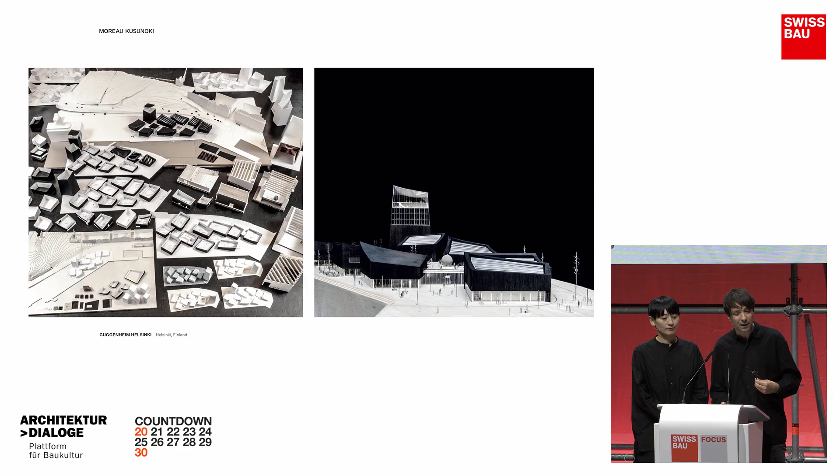I will show you. This project is also very meaningful for us because it crystallized some concept ideas that we are still developing and trying to implement, which is this idea of in-between space, or MA, that Hiroko could develop more, since it's a very Japanese approach of thinking space and time. It's this fragmented and in-between space that we believe is a moment in architecture that could expand life, expand poetry, or expand your own contemplation when you are visiting a museum in particular. You need this moment of being with yourself. We can speak a lot about that, but that's not the main topic.

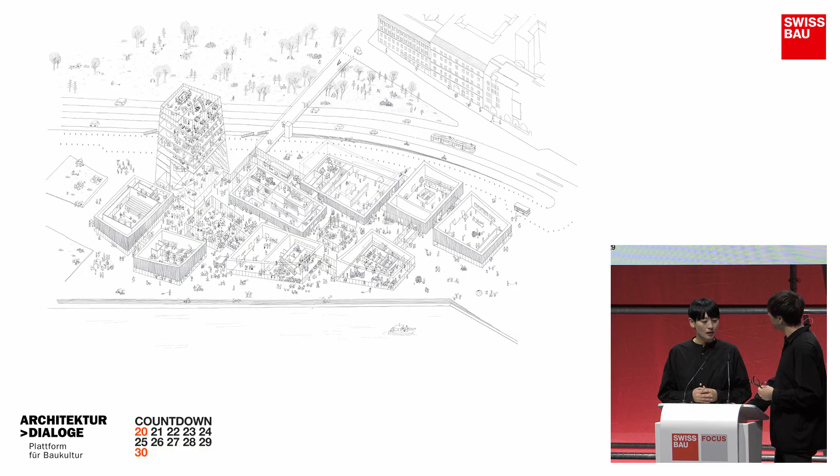Hiroko's drawings, you want to speak maybe? Yes. We started from this competition to make a hand drawing together with a mind map that we're going to show later. It's a black and white drawing, trying to not invite people to too rapidly understand the project, but rather to spend time getting familiar slowly.

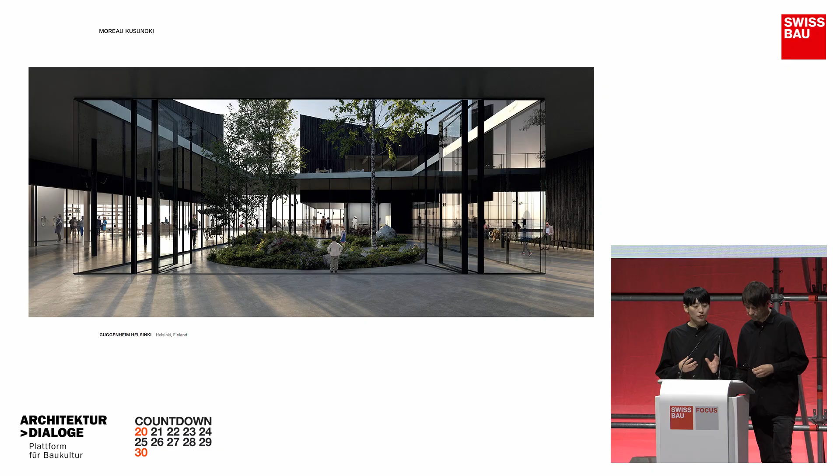So it was the idea with this fragmented volume that the visitor can really make their own experience, rather than being entertained by the overly designed building.

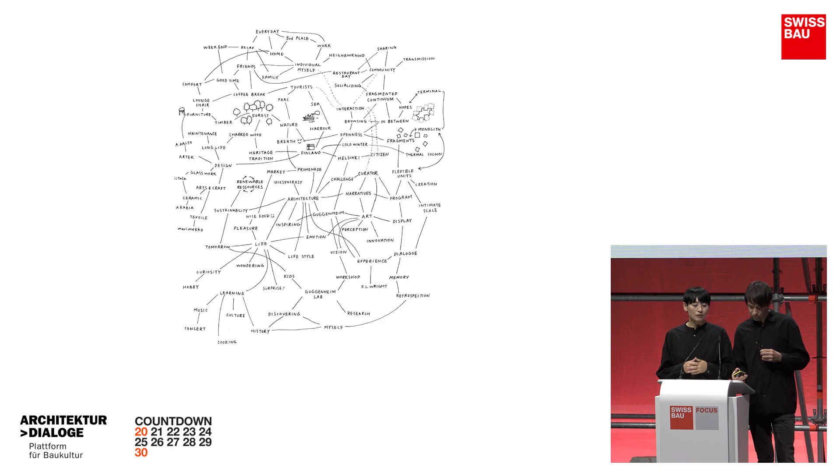So this is a mind map, shown in black and white, with key elements that normally don't appear in the competition brief, but are the essence we believe is important for the museum experience, like the flavor of good coffee or a calm corner to spend a moment of meditation. This kind of thing isn't politically strong enough to appear printed in the paper, but it's fundamentally important, so we try to give it value and not forget it in the process of conception.

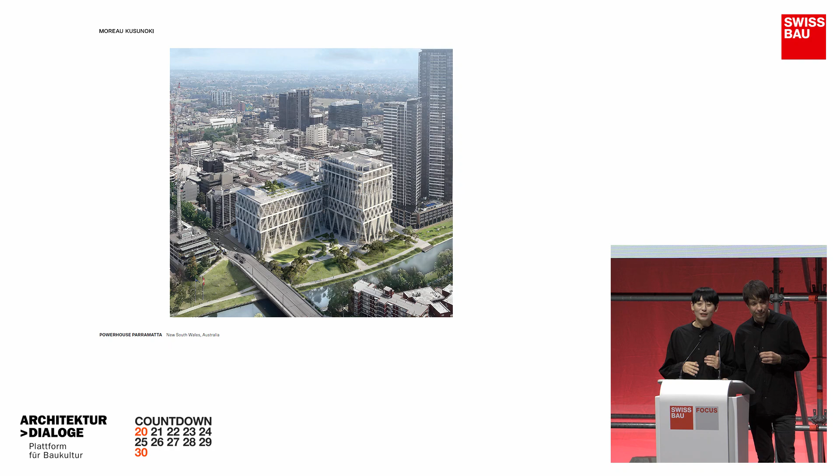The next project is a powerhouse in Parramatta. It's going to be built, so it's a real project, actually opening this year around October. It's in Parramatta City, the biggest hub from Sydney, with 30,000 square meters of exhibition space, quite similar scale to the Pompidou. Actually, there are many common points with the Pompidou.

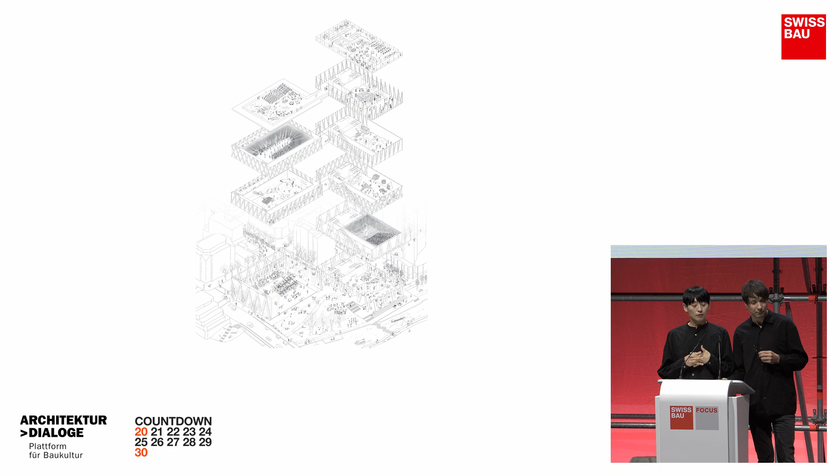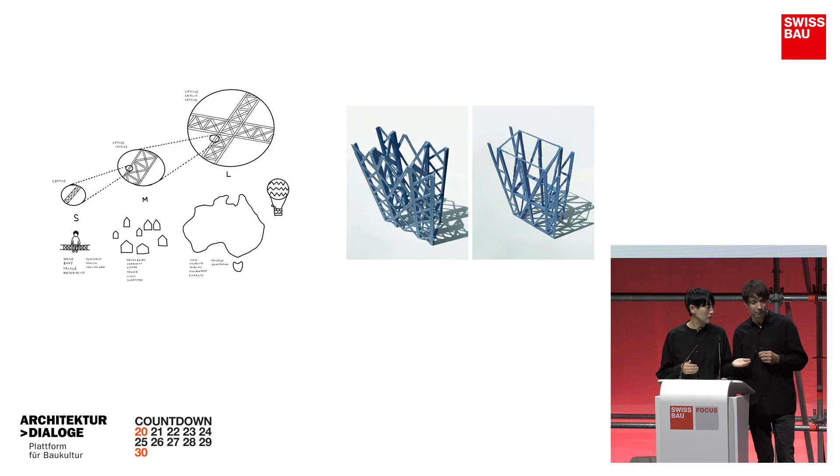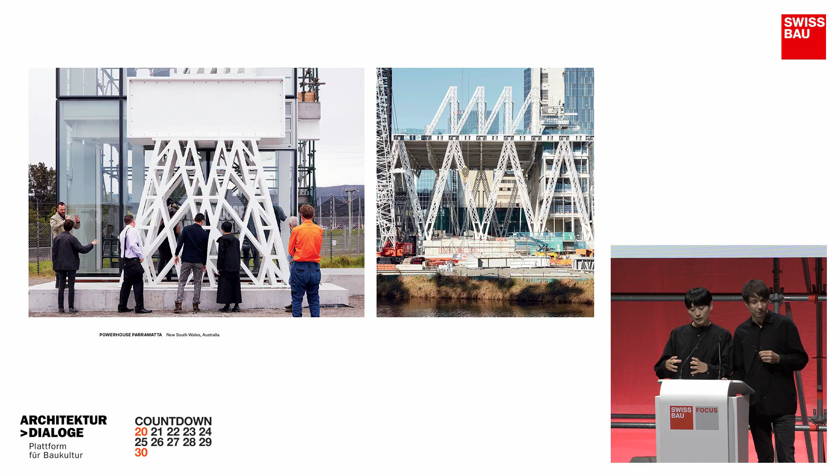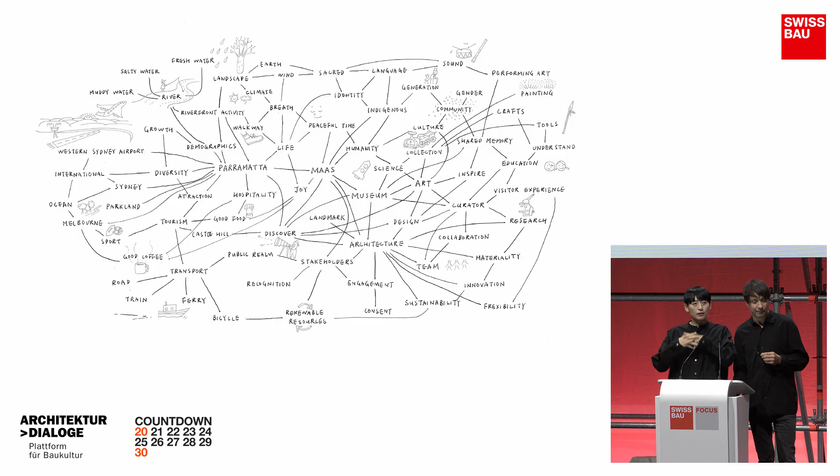It was built with a system of structure we invented with Japanese structural engineer Jun Sato. We call it lattice, lattice, lattice. It's a combination of three layers of scale: the smallest lattice is the size of a hand, reminding you of the body scale. Combining the small size becomes a medium size, and we use this truss system to build the building. Then combining the medium scale becomes large scale to make this infrastructural size of building.

Again, we made this mind map. We don't go into the detail. Okay, so now, Pompidou—so we can slow down.

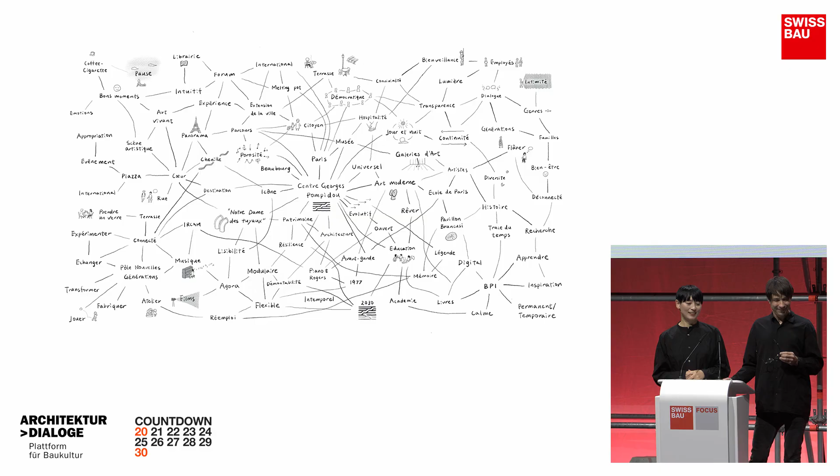Yes, so the Pompidou Center—it's nearly 50 years now since completion, and the building has aged, so there's a need for refurbishing. A competition was launched first just for purely renovation: changing the facades, changing the joints, the systems, removing pollution from asbestos. An engineer team won that competition about 5 years ago.

Then the president, Laurent Le Bon, realized it would have been a missed opportunity not to rethink the usage of the Pompidou—just reopening as it is would be a missed opportunity. So they decided to launch a second competition, which is the one we won, about rethinking usage. We are somehow married, and made a joint team with the engineers to go together into construction, which is starting in a few months now.

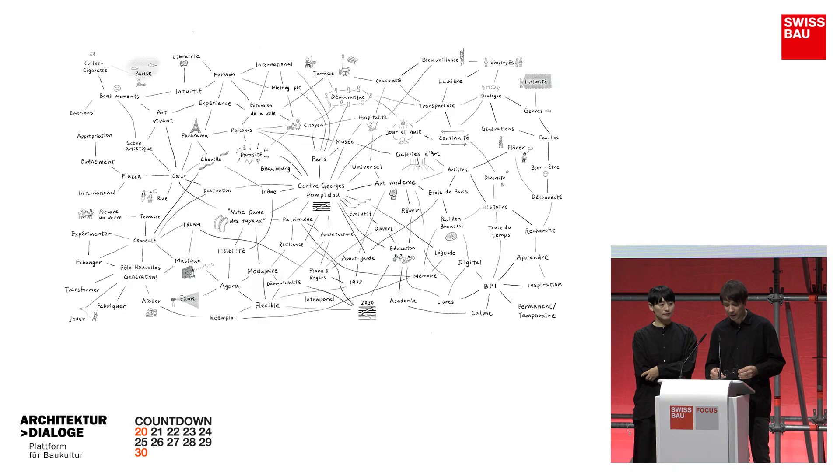So our proposal is, first, acknowledging that there is a heritage. This building is not protected, actually, and we are working on the protection—this is also something playing a role in the process. But our approach was already very, I mean, the word respectful—I don't know if it's the best word, but I think it is about that.

It's acknowledging the qualities and approaching the renovation in a manner where we don't want to denature—to change what is making the identity—and trying to keep what is making the authenticity and the initial qualities.

Even more, I think it's about an understanding that after 50 years, there are layers of accumulated change processed by the operators, the different directors. There are 11 directions inside the Pompidou, 2,000 people working in it—it's a city in the city. They've been creating slabs, adding things, changing facades, not necessarily in the best manner, or even putting the structure in danger at a certain moment by opening a certain area.

So our approach was to understand, to remove somehow this kind of pollution, these kinds of things, and to go back to maybe some ideals that were there 50 years ago—about transparency, porosity, transversality between fields: art, books, music, live theater, or live art vivant, which was really the concept in 1977 when it opened, a very subversive, crazy moment in history. The Pompidou is the incarnation of that moment.

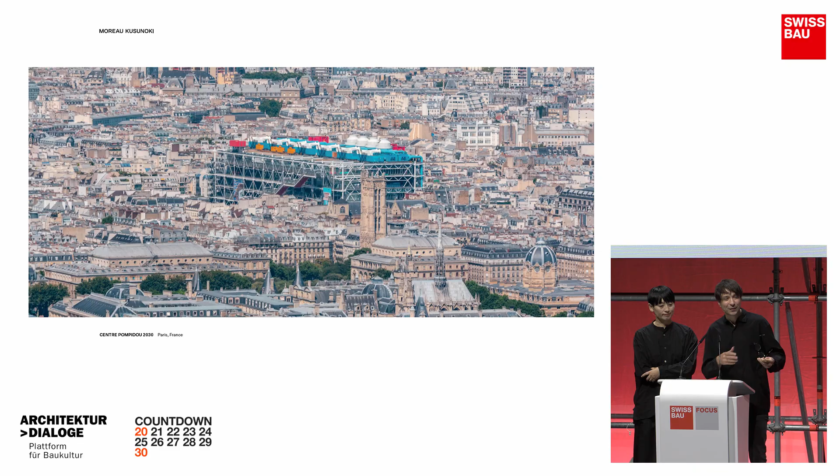So how to go back? Somehow it's funny, because it's going back in a respectful manner, but I feel that this attitude is somehow subversive today.

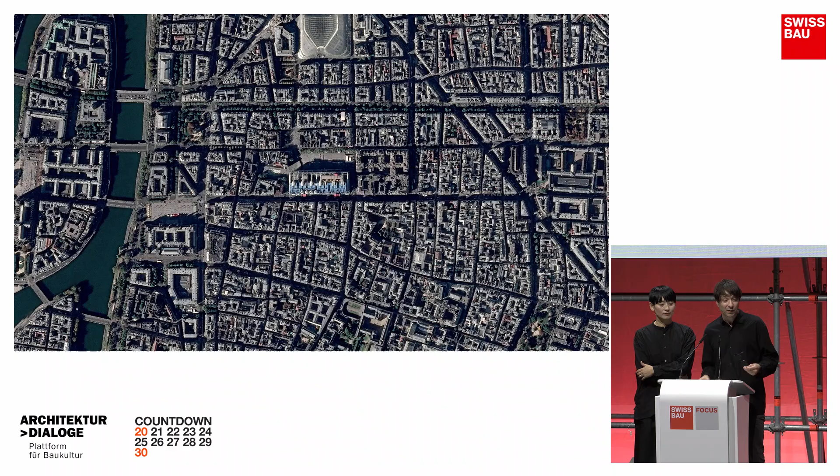So this, you know the story of the competition. It was an open competition, more than 500 teams. Monsieur Pompidou and his wife chose a project, and they were very much implicated in the process. There was Philip Johnson in the jury, and Jean Prouvé, and this crazy project happened, which is really the baby of Renzo Piano, because it was really how he made his career.

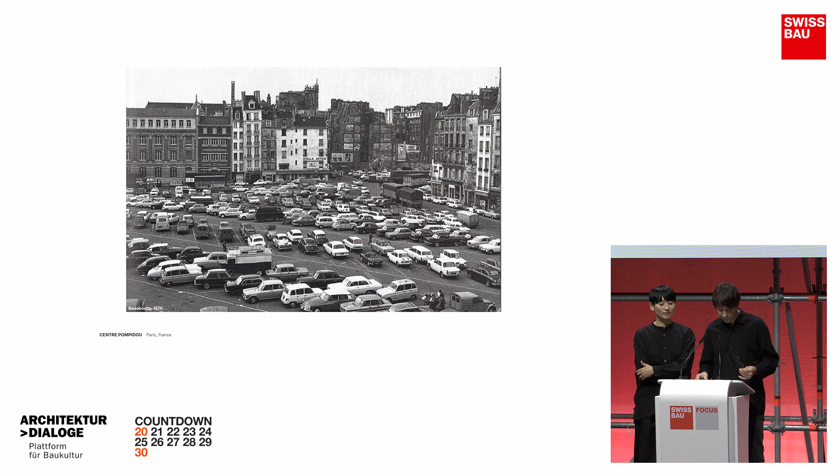That was the site before the construction, and that was the drawings at the competition stage, where you could see there was a lot of evolution between what they initially thought and what we have today. But there are core elements, like this logic of a plug-in city, a grid where you have the box, the large grid, and behind the building, creating this double height. Or the fact the building is lifted, which has somewhat disappeared, but is still there in a way, and I will go into detail about that.

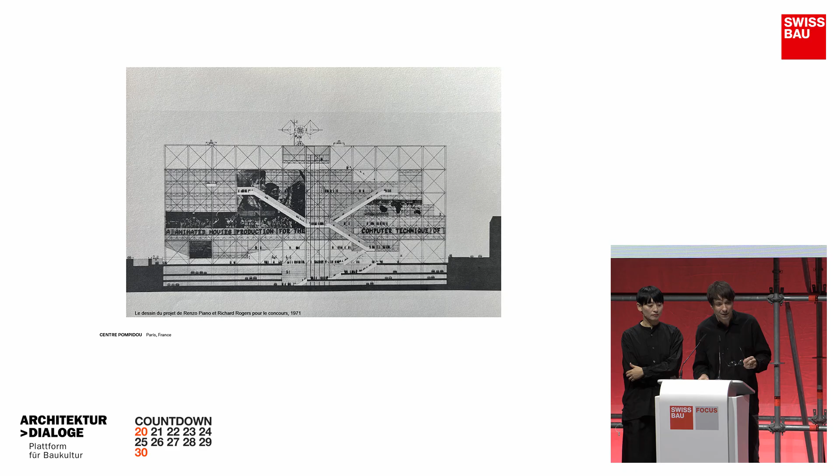The Agora and Forum, going down into the ground, you can see the connection with the cars, which was also kind of the dogmatism of the 70s, where everything should be organized around the car. So there is a tunnel actually next to this building. Buses were supposed to go there, and trucks below.

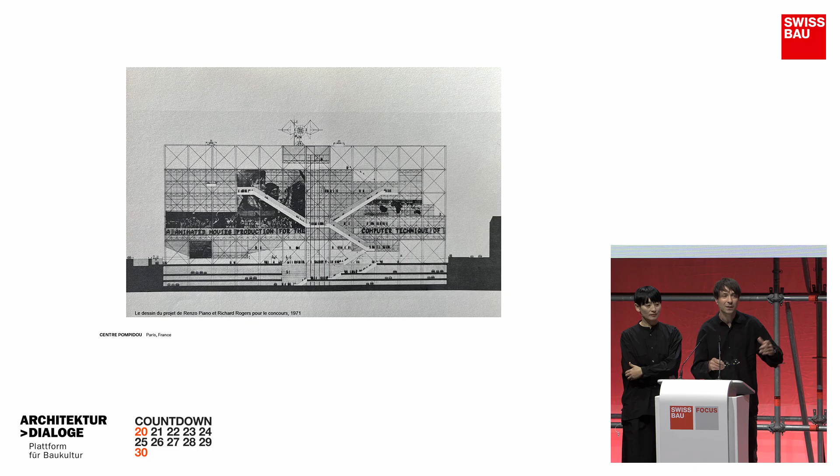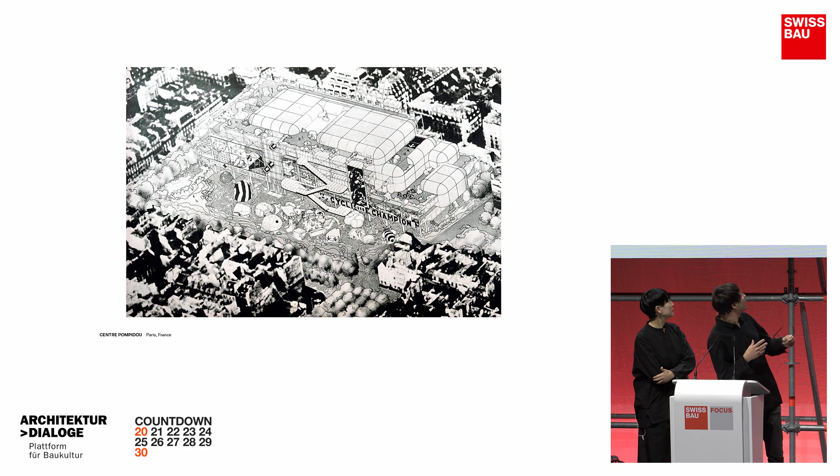Never happened. And here you can see an evolution. After they won, they maybe did a bit too much, trying to find other solutions, which they never pursued. But it's funny to see the piazza, how they wanted to make it maybe softer, with more plants also at a certain moment.

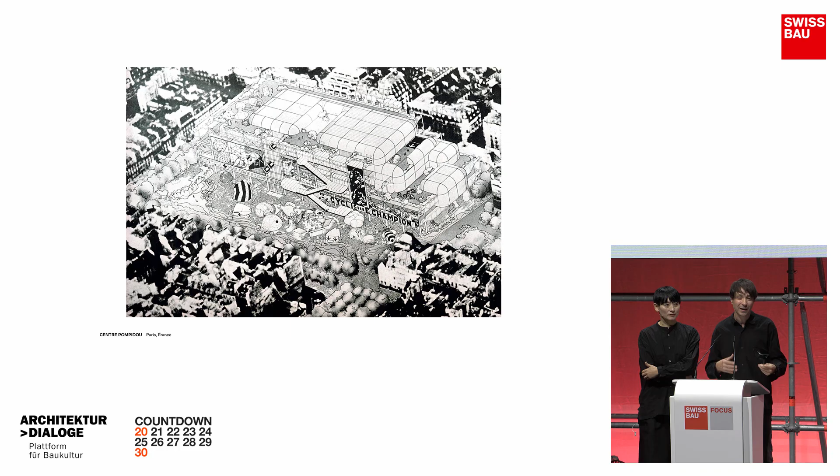And that's just after the opening. The opening was a huge success. The story says people were scared there would not be enough people, so they planned a circus on the piazza, in case people were unhappy, they could go to the circus. Well, and then it was a huge success that we still know—millions of visitors every year.

And the question is now, with this legacy, how we see things. First, the opportunity came, as I've seen, I'll show you the slide with the parking. Sorry, we'll go back. Oh, it's a bit—I will have another slide. Never mind. Below the piazza, you have 5 levels actually.

It's an iceberg. There is a production unit of 10 workshops, also a bit of storage, machinery, but there are also 3 layers of parking, which are underused. There is also a tunnel that was built by the city to bring in the big delivery trucks, and the tunnel was built too low, so no truck can ever enter this basement.

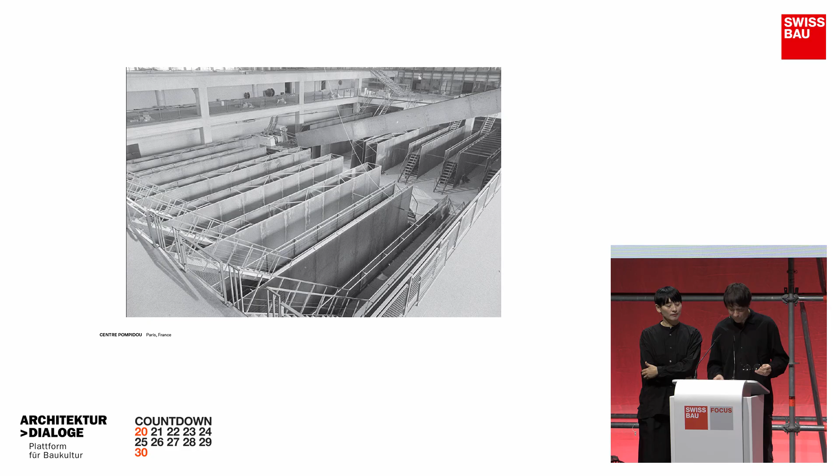So that gives us now the opportunity to create exhibition rooms underground below that piazza, removing where the cars are no longer necessary. And it gives us a chance to create something that has also disappeared, which is the vastness of the Agora.

That's a sketch made by Renzo for the competition, as an inspirational moment for the competitors. You can see this idea of using below the piazza as a public space, finding a way to have the vibrant core again back in the Agora.

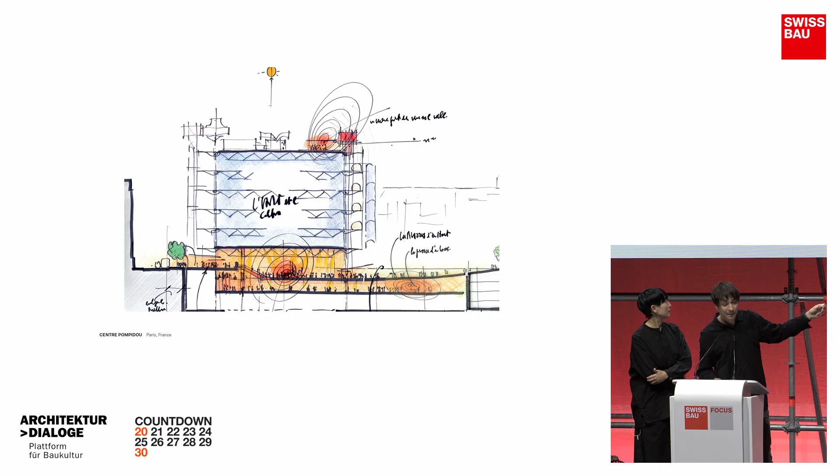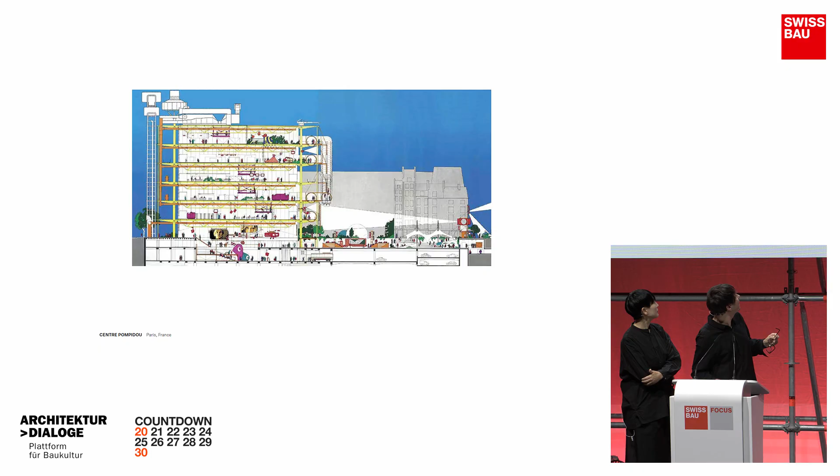And the reason why, because initially it was exterior spaces. And there was very quickly an issue with what I call la salubrité publique - dirt and people living there, camping or whatever, and accumulation of dirt. So the decision was made to make a facade there.

But the problem is they implemented the cinema, which is an opaque program, so they killed basically the north side of the facade, côté Rambuteau. And there was an exhibition on the south, mostly for the architecture collection in general, but this facade quickly became opacified for the use of the exhibition. So finally these two movements, which came very early, somehow killed the concept of transparency and openness, where we see in the drawings that the building was lifted and you were supposed to be able to enter totally in a seamless manner inside the building.

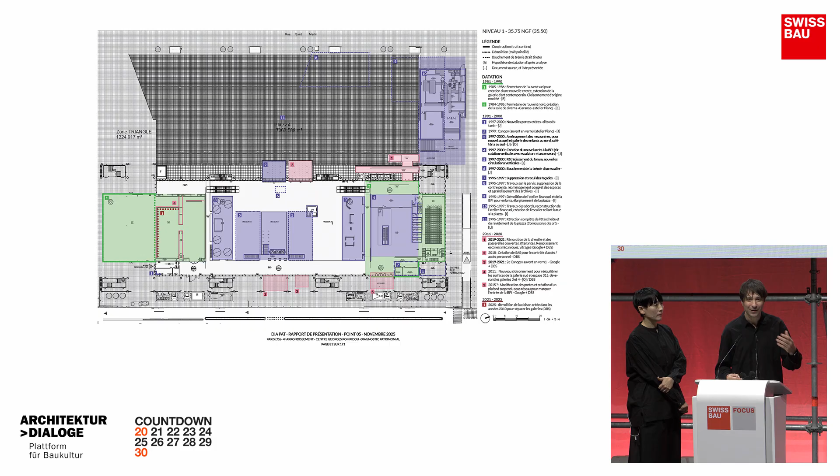So they closed the agora, adding floors, and on the left and in the center, on each side of the center of the hall, mezzanines were added also. So again, square meters, killing in a way the vastness of the agora, which was supposed to be - and it was at the beginning in the 70s - the site of massive and monumental inaugural exhibitions, which was not able to happen anymore. So our approach is somehow to understand this and try to remove these layers of accumulated change that has made the concept less legible.

Also, there is a question of accessibility, because when you are in a wheelchair, you cannot access the main entrance. So that's a problem - this is a stair that you can see here.

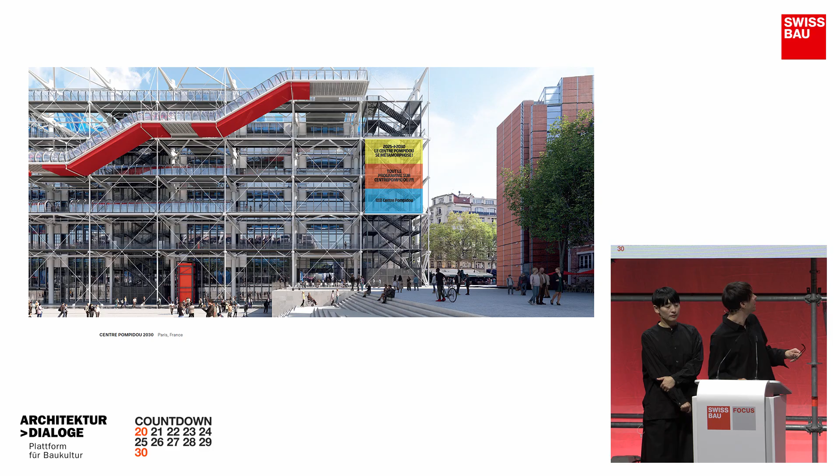Here are drawings. Hiroko, could you say some words maybe? I'm speaking too much. No.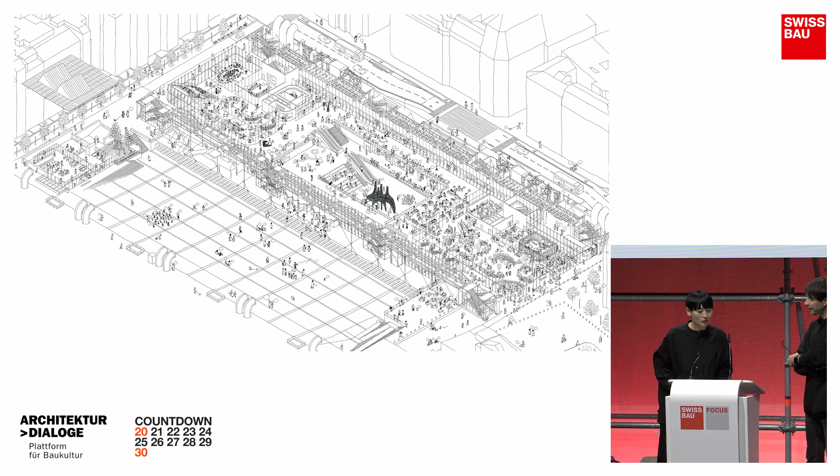Yeah, it's our scheme for 2030, again showing black and white - it was a competition element. So we use this word forum, agora - maybe it's not a familiar word for everyone. Forum is what we call the ground floor, connecting with the piazza. Agora is downstairs, so actually it's the basement 1 floor.

As Nicola explained, under the piazza we're going to have a new 2,500 square meter extra gallery space without natural light, which is the first time in the history of the Pompidou, because their exhibition spaces are actually located on the 5th and 6th floors with a panoramic view - very good for the visitor but not really easy for the curator. So they are very happy to have this new extra gallery space downstairs with a more curated situation. You will discover this new type of gallery in the 2030 opening.

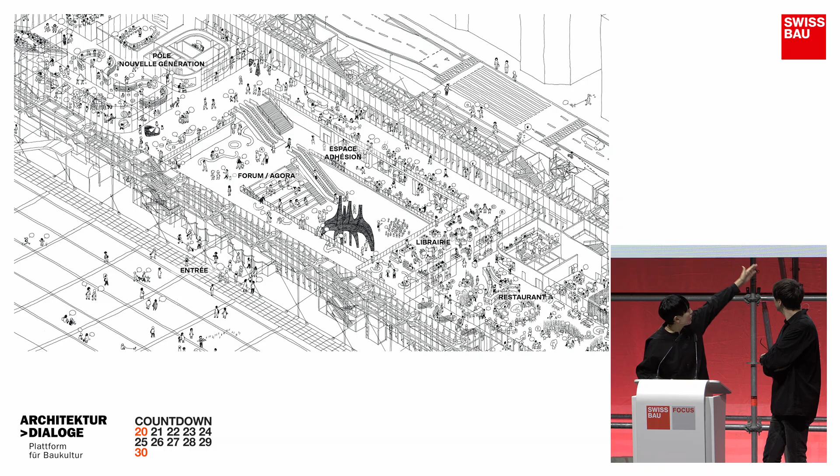As Nicola explained, on the south side we will have the restaurant, which is free access from the exterior - so you are not supposed to go to the museum, but just go to the restaurant. This is possible, and the library is located there too. Today we enter from the main entrance and go out from the same position, but in the new scheme we enter from the same entrance but go out on the south side, so that the restaurant and cafe area are on your way.

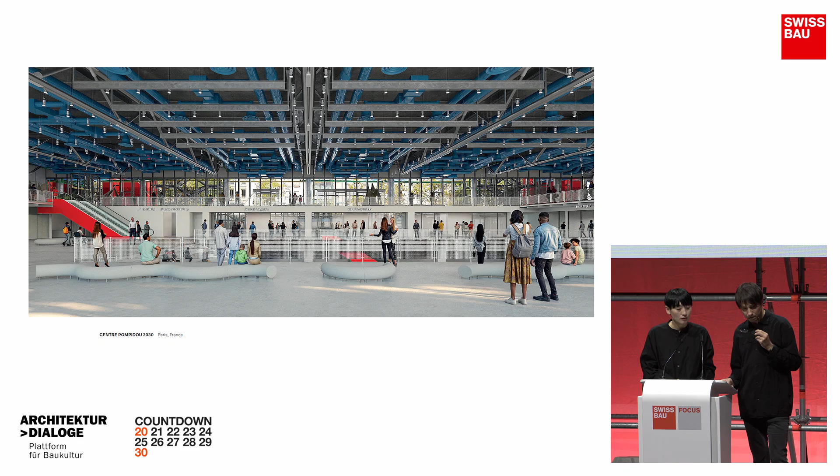We try to recover the size of the hall connecting the forum and the agora, so it makes it possible for the curatorial team of Pompidou to make bigger exhibitions on site. You have an amphitheater staircase, so people can have a pause, or it can become a theater where a temporary performance can happen in the entrance space.

Maybe a word about the transparency? Yeah, there is some change also which we are making, which is improving the transparency.

It's almost not recognizable, but if you are familiar with the building, behind the evacuation stairs you can see here it's opaque for fire purposes. The wall has to be fire resistant for 2 hours. Also, this large plate of 7,000 square meters is divided in 3, to create what we call in French fire compartments, and it's opaque too.

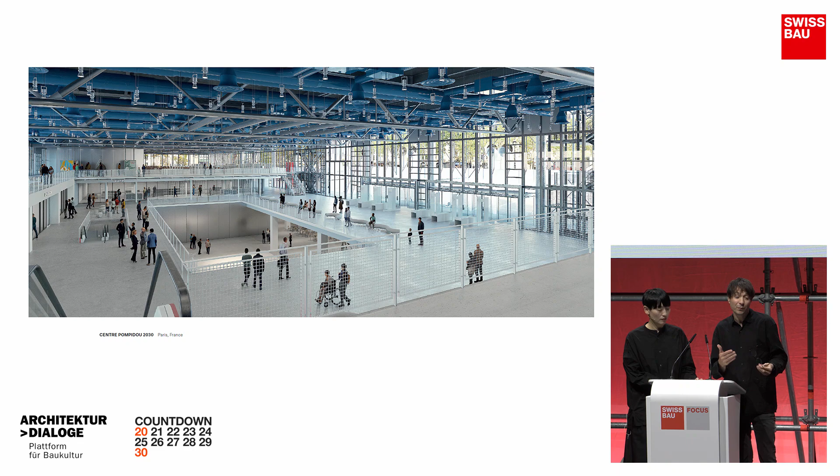So our move is to make this glass 2-hour fire rated, which is quite a challenge actually, because it will be 2 hours resistant from both sides, and it will give transparency. So from Rambuteau to Tinguely, Niki de Saint Phalle's fontaines, you will be able to see through the building entirely, 360 degrees. That's a change from the initial building, but I believe it's closer to the concept in a way.

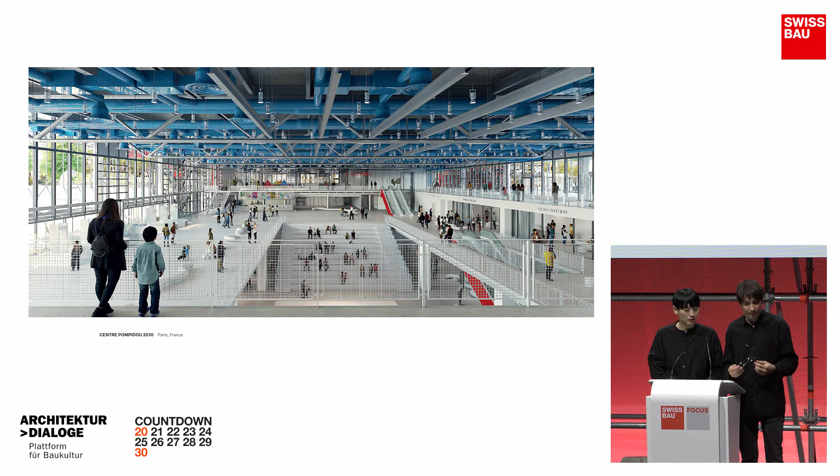So we see the amphitheater seating device that we are actually designing. Downstairs, we reconfigure the program: we will have 2 theaters, 2 cinemas, and 2 new galleries, which we call Grande Boîte and Petite Boîte.

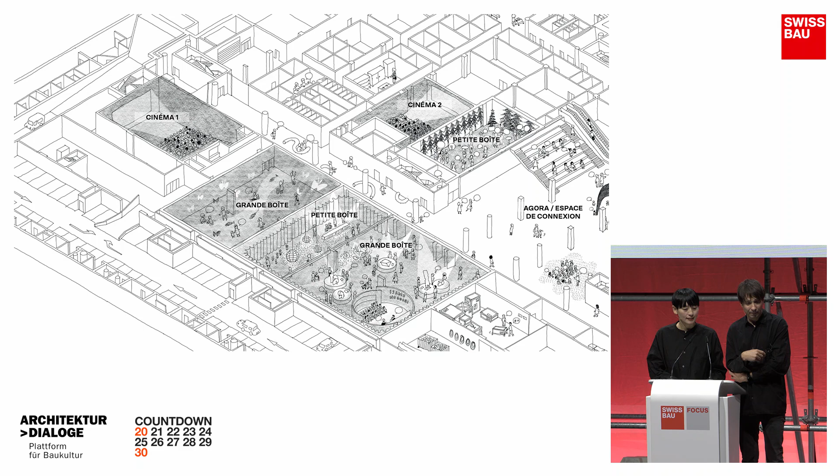This is underground, and all this blue area will be accessible to the public. It's a very large plateau where you have a lot of possibilities for performing, exhibiting, with 2 cinemas, 1 theater, galleries, immersive spaces. That will create a unique tool in Paris for performance.

I think also Laurent Le Bon, the president of the Centre, really wants to make this more like concerts and live events, open to the neighbors as a social hub.

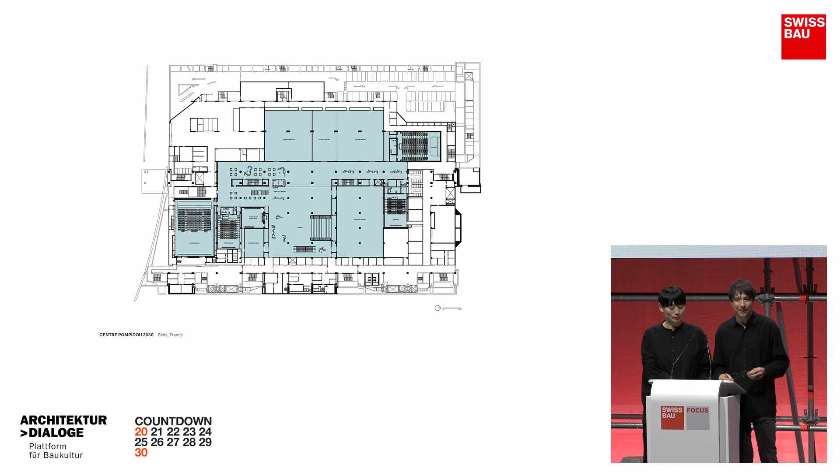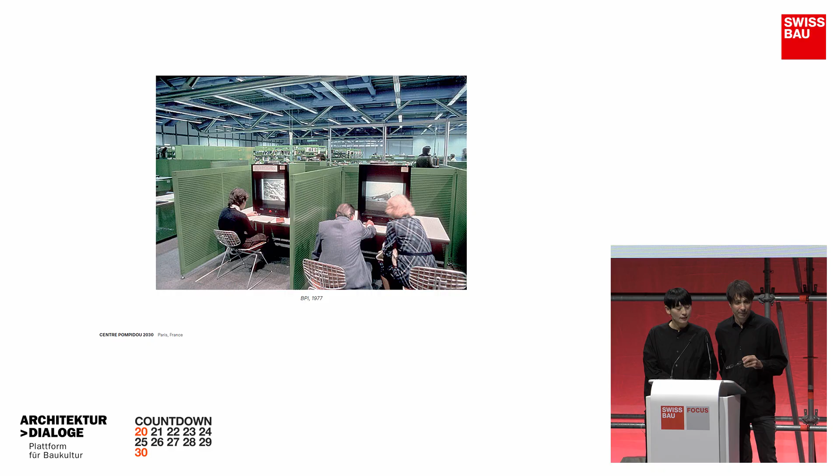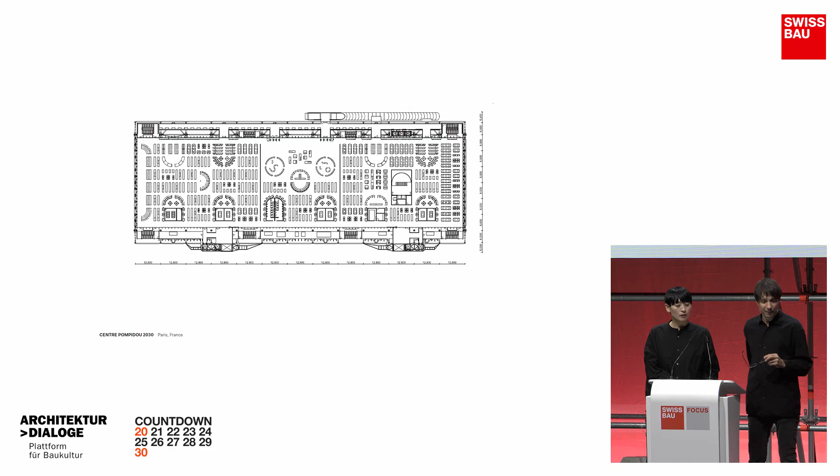With associate designer Frida Escobedo, the Mexican female designer, we are designing this new 2-level library space. Anyway, you will find it in the video later.

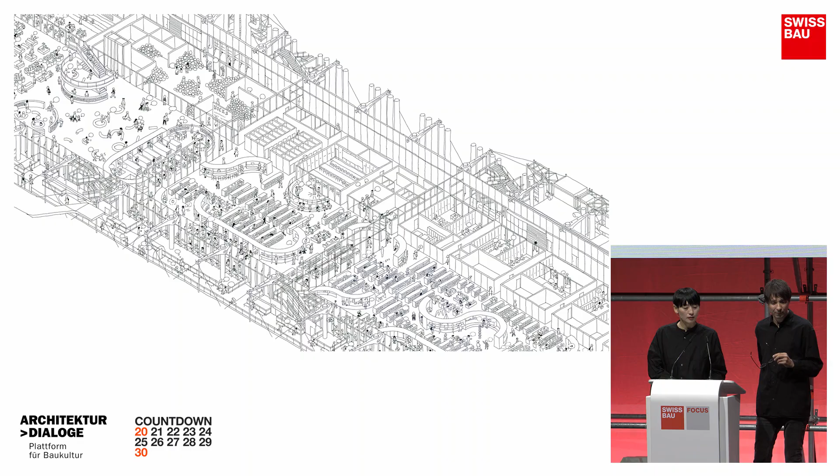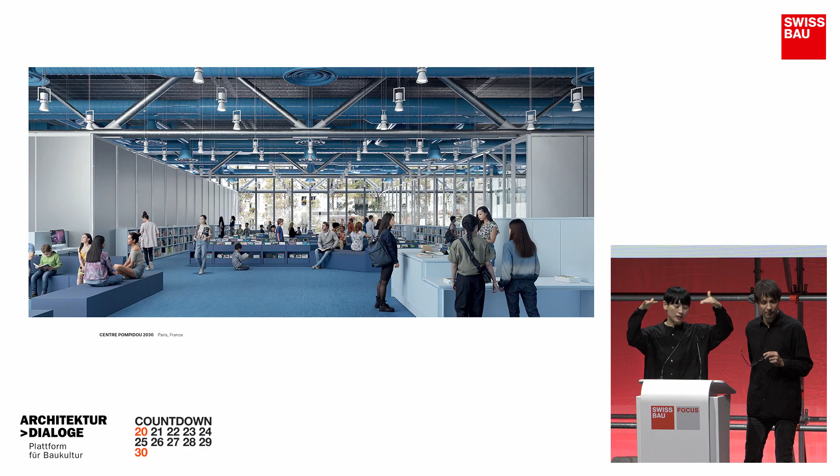This time we apply a tone of blue so that it doesn't compete with the presence of the pipe on the ceiling for the air treatment, giving a more horizontal, sky-like blue ceiling, and like a sea with the blue carpet and the blue low furniture, so that the clear, net panoramic transparency is conserved.

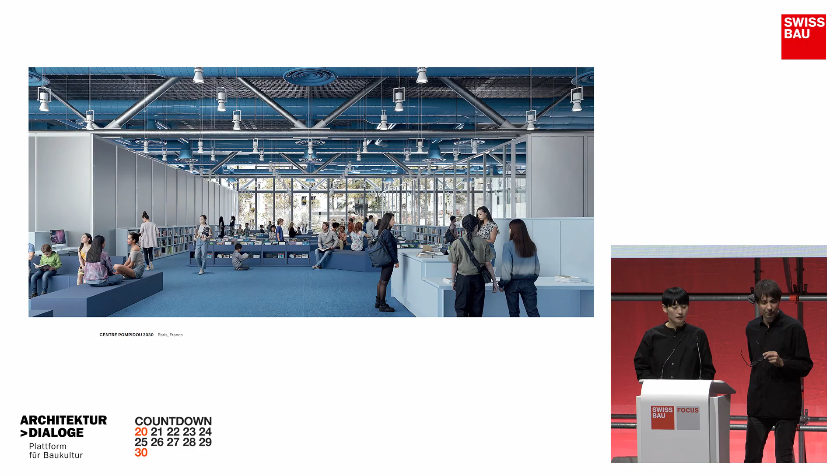This is a particular strong wish from President Le Bon to make the roof accessible, which was not possible at the opening time because there was a pipe evacuating used air, which may contain chemicals that could be harmful for the public. But since we modernized the MEP system, the roof has become clean, so it's going to be accessible for the public to enjoy the panoramic view.

Some images from the closing event. In 2025 we have a series of events, many parties, many installations. And now the building starts to sleep for 5 years.

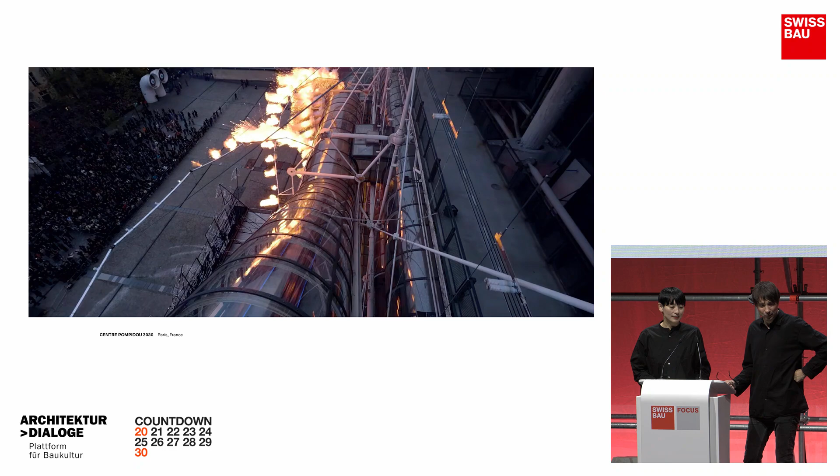Yes. And I think now there is a video that can be shown. Please, could you play the piano video?

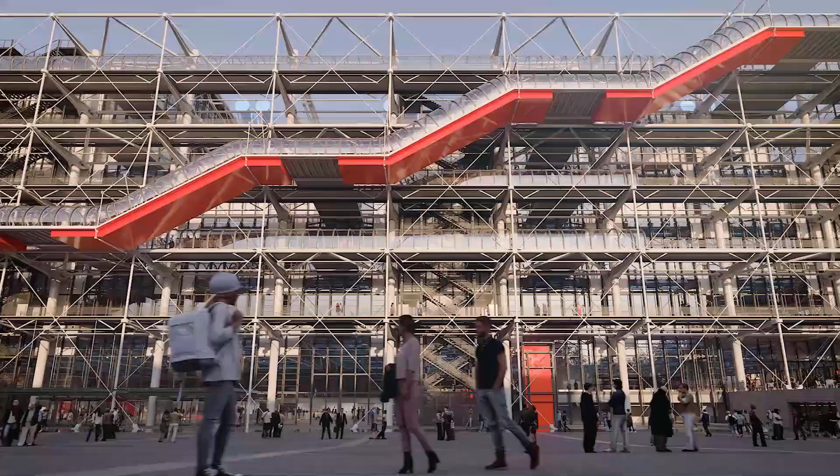That's it. Thank you. Thank you.